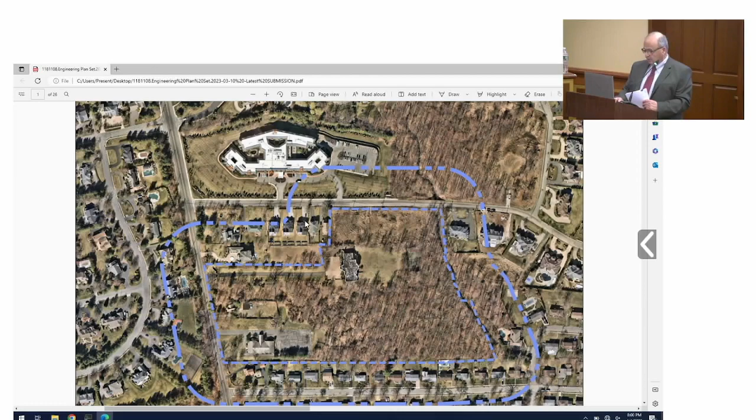The property is located on the north side of East Mount Pleasant Avenue, which runs along the left side of the exhibit. To our west is Force Hill Road, which runs along the top of the exhibit. As you can see, the area immediately to the west is the Brandywine facility that was recently constructed, maybe about 8 or 10 years ago. The adjoining properties immediately to the west are residential single-family homes. To the north are single-family residential homes in Bel Air Woods, and there is additional single-family residential construction on the far side of East Mount Pleasant Avenue.

Immediately to the east of the site is Nance Road, which is in the township of West Orange, and these are all single-family homes that exist along our eastern boundary. The property is somewhat irregular in shape, as you can see from the exhibit. It has 479 feet of frontage along East Mount Pleasant Avenue, and the property extends to the north, with over 500 feet of frontage along Force Hill Road.

On the northern boundary of the site is a tributary of the Canoe Brook, and there is a vast amount of wooded area in the northeast corner of the site. This area is classified as wetlands, so approximately 30% of the site, or 4.88 acres, is impacted by freshwater wetlands. We've received a letter of interpretation from the DEP confirming the location and quality of the wetlands. The wetlands also have what's referred to as a wetland buffer of 50 feet. Our entire project will be developed outside of not only the wetland area but the wetland buffer as well, so we don't need any additional permitting from the New Jersey DEP to develop the site, because we'll have no impact on the wetlands or the wetland buffer.

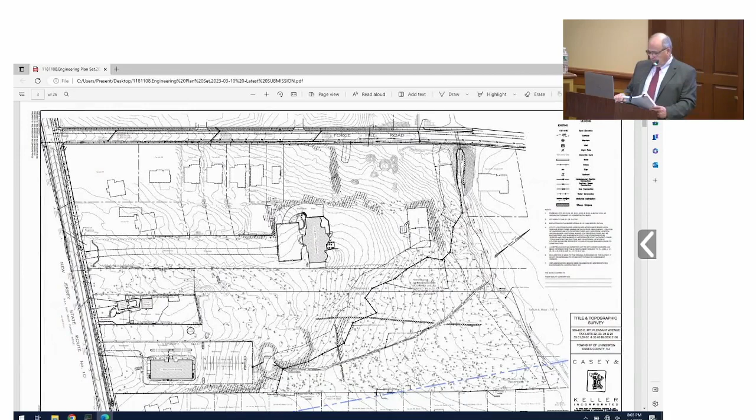I'll bring up the survey, which is sheet 3 in your plan set. Let that focus in. You can see that the wetland line runs diagonally from the western property line to the north, and then up along the tributary of Canoe Brook, which runs along this common boundary line between us and the properties to the north. The 50-foot riparian buffer, wetland buffer, runs along that line. You can see the lighter line that exists in that area.

On this exhibit, you can see the little hatched areas. These are areas of steep slopes. They're not natural steep slopes; these were created as part of the prior developments on the site. You can see there's a 5-bedroom single-family home that's constructed and set far back from East Mount Pleasant Avenue with an extensive driveway, parking court, and access to the garages. There are tennis courts at the rear, and there's a variety of walkways and plantings.

There's also a three-bedroom single-family home constructed close to East Mount Pleasant Avenue, and finally the Full Gospel Hall that exists in the eastern portion of the site. This is the church, and they had a parking area immediately to the north. This parking area drained into an existing stormwater management basin that discharged to a swale running through the wetlands.

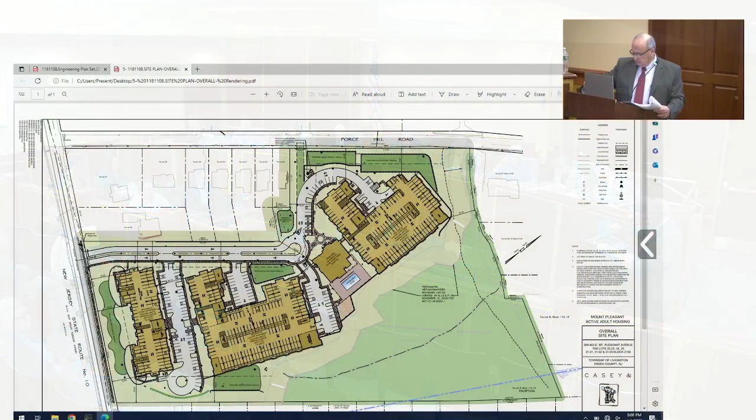Let me close that and bring up an exhibit. We took the liberty of colorizing the overall site plan. This is a colorized version of sheet number 5 in your plan set, and I think we're going to mark this exhibit A1. This is a colorized version of sheet number 5, the overall site plan. What the project proposes is the construction of 254 rental units in 3 separate buildings.

Building 1 is located parallel to East Mount Pleasant Avenue on the far southern end of the site. Building 2 would be the central building, and Building 3, along with the clubhouse, is located in the northern end of the project, closer to Force Hill Road.

The 254 units would yield a density of 15.42 dwelling units per acre, where 16 dwelling units per acre is permitted under the ordinance. All of the buildings will be 3-story structures over a parking garage, with elevator service in every building. The height is measured from the first living level to the midpoint of the sloping roof, and the allowable is 40 feet, while we're at 39.58 feet, so we're well in compliance with the ordinance.

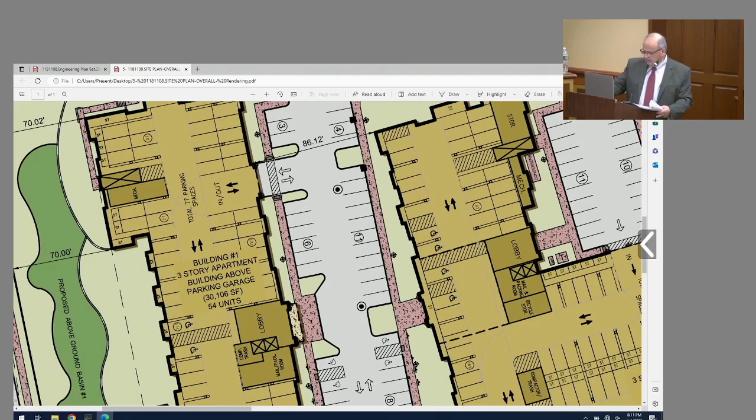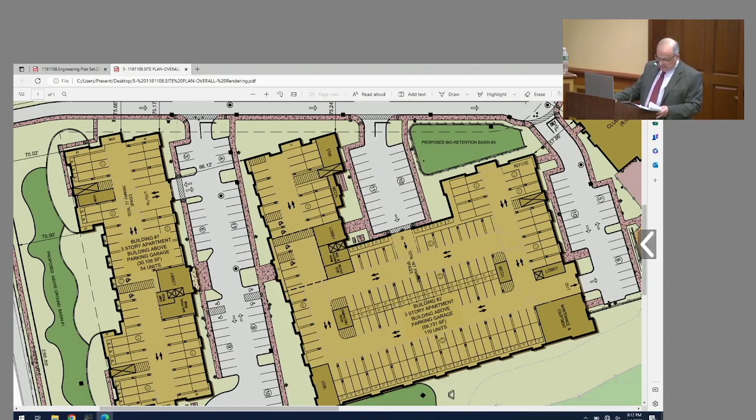There would be a total of 110 dwelling units in building number 2. The parking garage within the building would break down into 167 available parking spaces: 69 standard 9x18 spaces, again 6 of which would be EV ready, 94 tandem spaces assigned to 2-bedroom units, and 4 handicap accessible spaces.

You can see from this blow-up that there's a primary access in and out of building number 1 in its northwest corner, directly accessed off a surface parking area, so there's one way in and one way out of that building. On building 2, we come into a central area that comes in off the boulevard driveway accessed from Route 10, allowing circulation through the garage and exit at the northern end into another surface parking area that brings you back out to the boulevard.

Question: on the dual spots, how many sets of dual parking spots are there? In building number 1, we have 64 tandem spaces, so that's 32 groups. In building number 2, we have 94, so that's 47 groups.

And building 3 has 90 dwelling units, with 135 parking spaces available. 54 are standard 9x18 spaces, with 6 more EV charging stations in this building, 78 tandem spaces, and there'll also be 3 handicap spaces proposed within the garage.

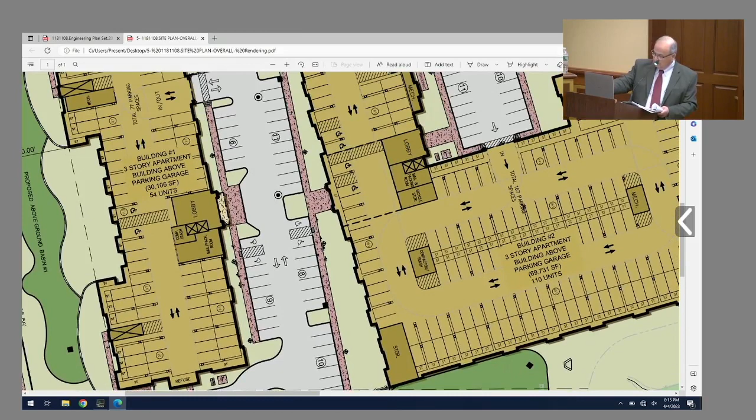On Building Number 1, we have a refuse area located at the far end of the building. The truck would come in, utilize this area to back into position, collect the refuse, and then exit via the cul-de-sac. This also provides for a little cutout by the two lobbies - a lobby on the lower level for Building Number 1 and an upper lobby on Building Number 2 - so vehicles like UPS or Amazon delivery trucks can park in this cutout and do their quick drop-off to the building.

Question: where's the access from the cutout to the building for the Amazon delivery spot? There's a lobby on the lower level here, and this is building number 1.

Is that better? Okay, here's the lobby on building number 1. The cutout is located here, so the vehicle could pull up, come into the lobby, drop off packages to the mailroom, and then come around and exit via the cul-de-sac. If they wanted to deliver to building number 2, there's an upper lobby they can access through the door located here, and they would come into the building and do the drop-off to the mailroom at that level. So there's a mail/package room in each building? Yes, there's one located in each lobby.

Let's go back to the tandem spots. How many tandem sets are there versus how many 2-bedrooms are there - are there some 2-bedrooms that don't have tandem parking or not? There's enough 2-bedroom units to support the tandem spaces in each of the buildings. But is every 2-bedroom unit going to have a tandem setup, or will there be some extras? Not everyone, no, but it'll be very close. Let me see if I have that.

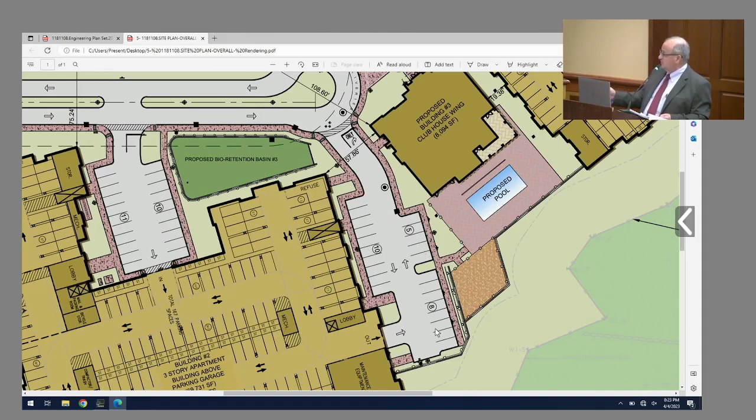Now, the only area where we did make some special consideration is along the clubhouse. The 13 spots that are located along the clubhouse are signed for 2-hour parking maximum. So we figured there'd be little events at the clubhouse, we'd want to be able to move those vehicles in and out of those spaces in a reasonable way.

So the surface spots, you need 127, and I think you had 122 surface spots unreserved. And that's where the 5 potentially having to be in building 3 comes from? That's correct. So, but does that then render the entire garage of building 3 not restricted access? Or are you going to design it in such a way that the gate is beyond just those 5 spots?

What we've done on other applications and similar projects is cordon off only a section of the parking lot, so there would be a fob-operated gate beyond the internal 5 spots or garage, not at the door. The gate would be beyond the 5 publicly accessible spots, not at the gate to the garage.

I'm having trouble hearing you, Barry. The security gate would be after the 5 spots that are indoors. That is correct. Do the affordable units park outside or inside? They'll park in either location.

So in other words, the plan right now—and everyone's concerned about the parking—is that 2 of the buildings will have some sort of internal gate or fob. Other than the tandems, which will be assigned to 2-bedrooms, once you're inside, you can park wherever you want, whether you live in an affordable unit or a market rate unit.

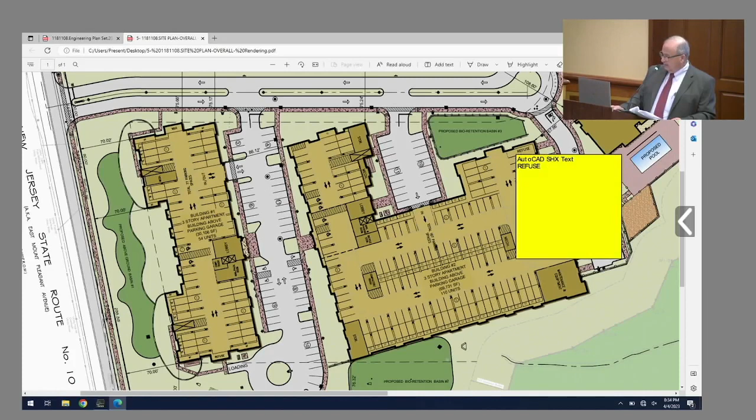Building 2 and building 3, which is the clubhouse, is the closest point at 57.86 feet, where 50 feet is required. I also want to point out the configuration and orientation of the buildings.

What we attempted to do, and I think we accomplished it quite nicely, was to orient the buildings so we could control the mass as it appears from adjoining properties and from the street.

As you can see, the orientation of building 3 is a bit cocked as it appears along Force Hill Road, which runs along the top. It's set back well in excess of the setback requirement along Force Hill Road, which is 45 feet, and we're at nearly 75 feet along that stretch of roadway.

The articulation in the facade of the building also sets it back much further from the roadway, so that even though it's 3 stories in height, much of the mass of the building is pushed closer to the wetland areas, so you don't see a massive structure. You see it broken up.

As I said earlier, the density is compliant at 15.42 dwelling units per acre, where 16 are permitted. We're limited to a maximum of 125 dwelling units in each building; the most would be 110. The number of buildings required is 2 minimum and 6 maximum under the ordinance, and we're proposing 3. The building height is compliant at 39.58 feet, where 42 feet is permitted.

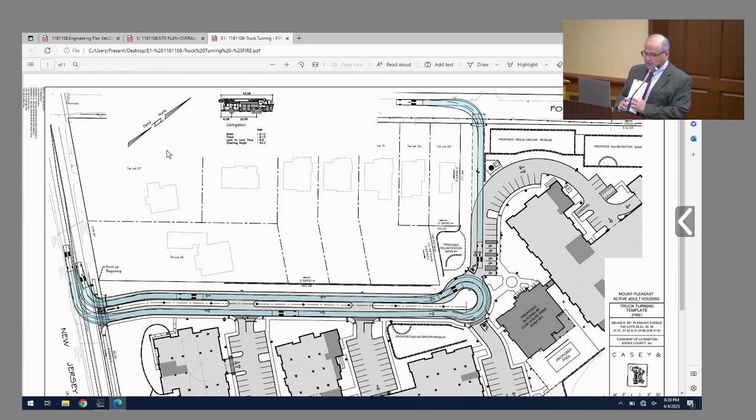What we had neglected to do—is this going to be Exhibit A2? This would be Exhibit... it was submitted as part of the set, Peter. Oh, was it, even with the coloring? It was submitted as sheet E1, excuse me, and it was blue in the submission, right? Yeah, okay, so we don't need to mark it, thank you.

So we did this at the request of the chief, to show him that the fire trucks can maneuver around the cul-de-sac.

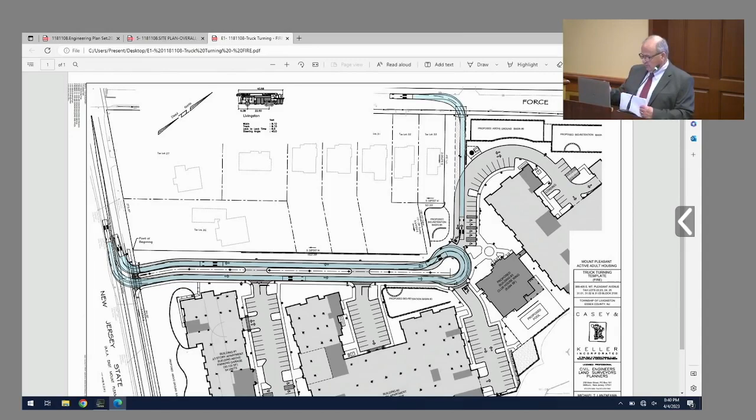We also have, as part of the design, emergency ingress and egress out to Force Hill Road. This would be a grass paver access roadway that would allow emergency vehicles to enter the site should the boulevard for some reason be blocked. We've indicated on this plan a post and chain down at the right-of-way.

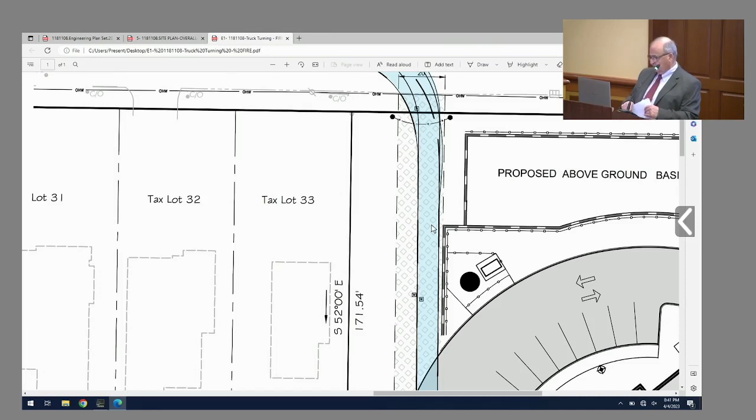What we decided to do - I didn't get a chance to update this - is we're putting a more decorative gate that would occur at the jog in the retaining wall so that it's set back from the street. That would be a more decorative metal gate with a Knox box so the fire department could unlock it and open it up to allow entrance. You'll see that on the renderings once the architect testifies.

This secondary means of emergency ingress and egress was added at the request of the fire department, and was a conversation we had at the TRC meeting. So we've incorporated that into the plan.

The other truck turning analysis we did is for the E2 garbage truck coming into the site and accessing the loading area by Building 3. You can see this can easily maneuver through the site as well and make the turn at the cul-de-sac.

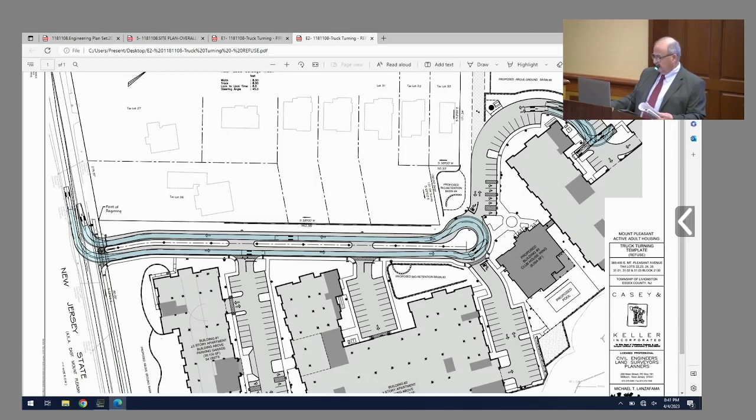A question arose: what would happen if a vehicle decided not to use the cul-de-sac to turn around? What if they came down by the entrance to Building 3 - how would they make a turn? We've allocated a space here, opposite the loading area, so a car or truck can easily make a K-type turn and exit back out of the site.

There are trash rooms located in close proximity to these loading areas so the garbage trucks can easily access them, and the maintenance staff can easily bring out the trash to those locations.

Are you going to talk more about how the trash is coming out, or is that for the architect? Well, I could talk about that. Let's go back to the overall site plan. Let's start with building number 1. In building number 1, we've allocated a refuse room at the western end of the building.

The trash rooms have chutes on every floor - there'll be trash rooms on every floor. They drop the trash down, and it's assembled in that one room. There'll be a doorway out of that room, and the truck would come in, back into position, load up, and then exit. Now on to building number 2.

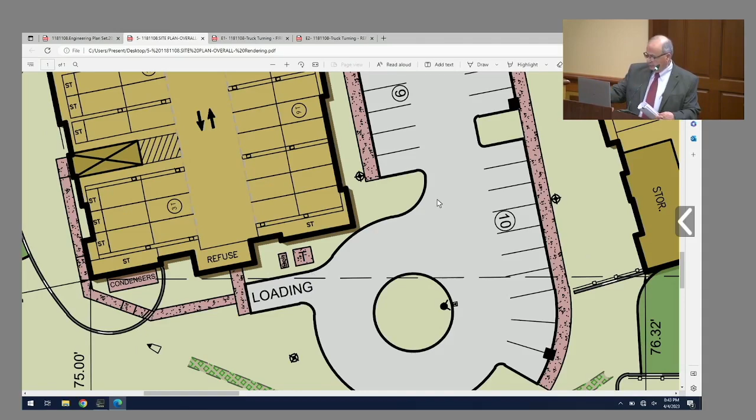Is that also where the move-in, move-outs come from, through that loading area? Yes, you can do it there as well. So if you're loading from that position, how do you get into the building - how do you get your carriage in? Move-in and move-outs can occur at this slot, at the cutout, which would allow access into the building.

Which cutout - use the cursor. The cursor's not working, but the cutout through here at the main lobby would allow for entrance into the building and use of the elevators. So you're going to park a truck where the pink is? That's a sidewalk - we'd park in the gray area right in here. This is large enough to receive a small U-Haul. Remember, these are 1- and 2-bedroom apartments, so you're not seeing a huge Allied van lines truck come in - you're looking at smaller U-Haul type trucks.

Even some of those smaller trucks can fit into these parking spots without a problem. So the idea is to utilize this cutout and these sidewalk areas - you could bring stuff across into the lobby, and that would also allow for move-in and move-out for building number 2. You can see we have a trash compactor located in building 1. Once the compactors are full, they bring them over to the refuse area where they're staged for discharge into the trucks.

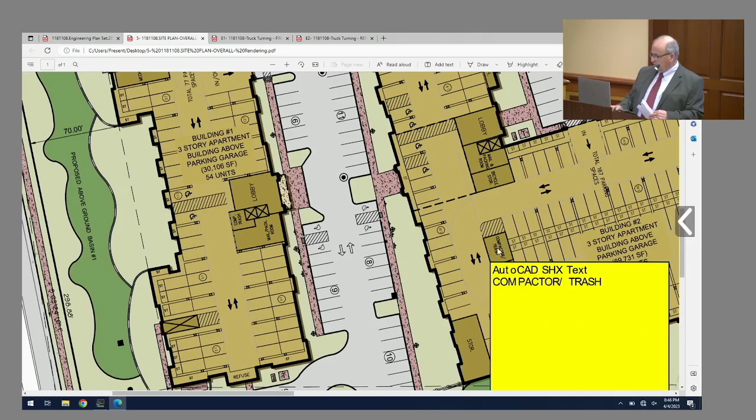Wait, I'm sorry, so the lobby's on the parking level? This lobby is on the parking lot level, got it. Coming in here, again, we have a trash compactor in building 2, located centrally in the building.

Again, we have the refuse proposed at the far corner of the building, so we have to get the refuse containers at that location. What we were anticipating is that the garbage truck could either pull up along the roadway here, fill it up, and then utilize the driveway to the garage as a means of making a K-turn.

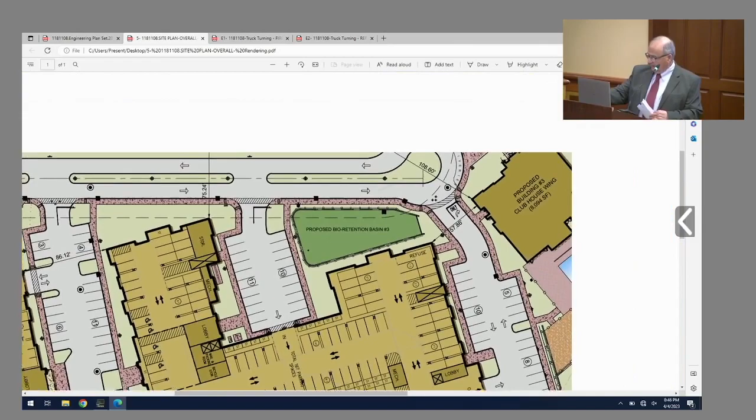Mike, I'm confused with that one. Building 1 is simple to understand - you're talking about moving the garbage, which is not our problem, it's the building management's problem, from the far side of the parking lot across to the pink and green area. Where is a garbage truck going to come in, whether it's a front load or a back load? He's going to pull up alongside the driveway here, load up, then come around and make a K-type turn here and exit the site. That's what we anticipate.

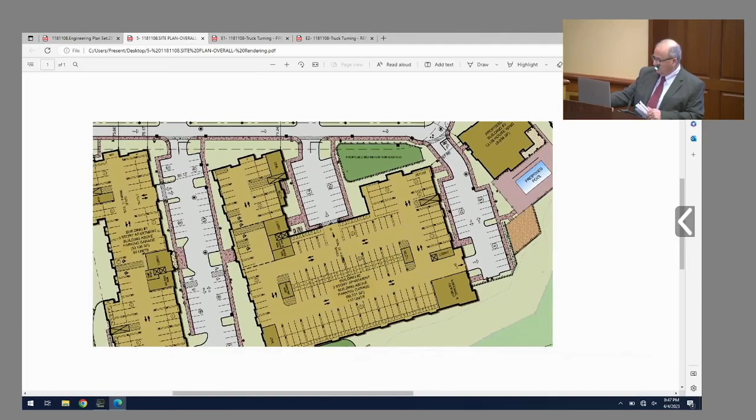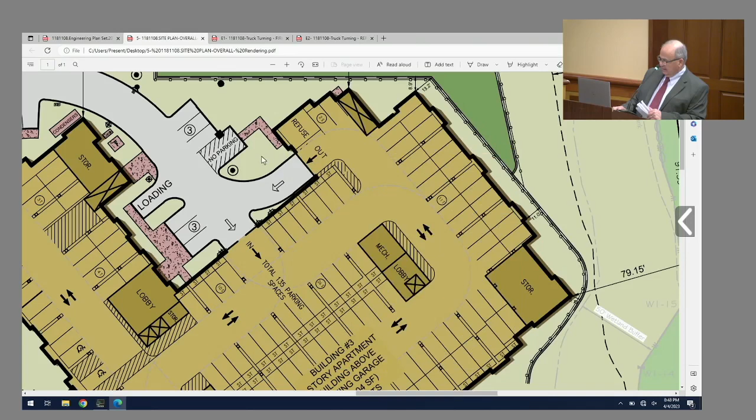With regard to building number 3: the trash compactor is located in the garage level, and we propose to take it to the north side of the building. There'll be a refuse room here. That would allow the truck to come in, pull in through here, back into the no parking area, and load the truck. It can then exit - no, he pulls into the loading spot, backs in. The walkway would allow them to bring the refuse out to the truck, and then it makes that right-hand turn and exits the property.

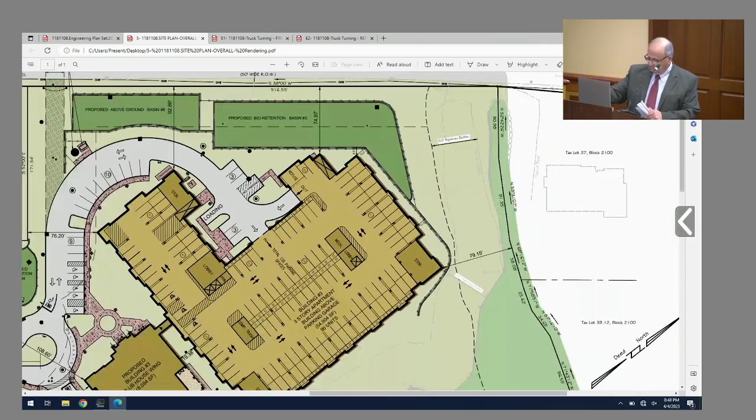Is the loading spot in front of building number 2 as well? Because it didn't seem to be a specific loading area. No, what we did was have the loading area in front of building number 1, directly opposite the entrance to building 2. There is no special loading area for the back building.

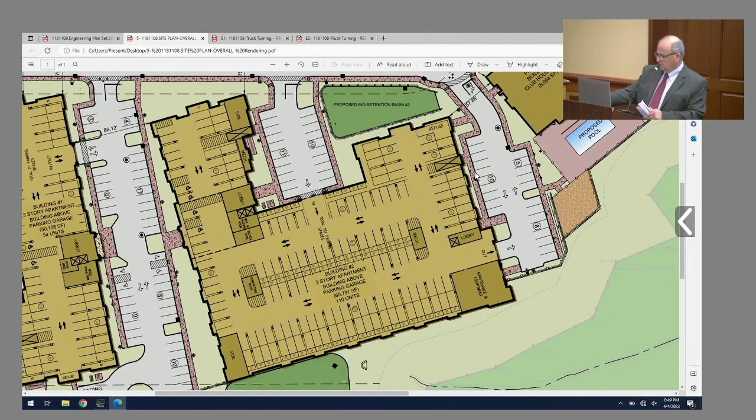Can I ask, Mike, is there a definition of a loading area in our ordinance? Does that meet it? Yeah, it has to be 10 by 25 feet, or 10 by 26 feet. They're all compliant, marked as a loading area. So is there a requirement for one for each building? It doesn't say we have to have one for each building.

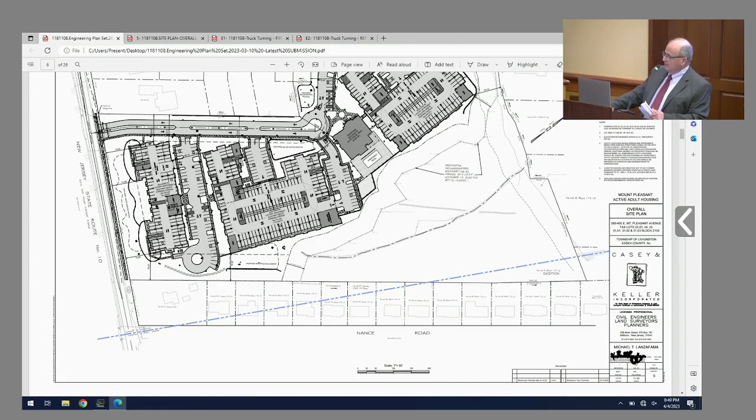But what we've done is created loading spots at key locations for trash removal and for move-ins and move-outs. In some instances it's a parallel park type spot, in other instances it's like a tailboard type spot. So going back to Building 2, which is the largest number of units of all the buildings - I believe Building 2 is the largest, has 110.

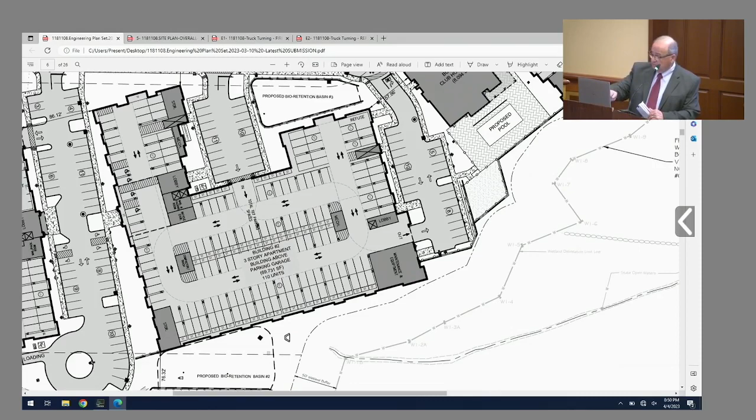So where is the loading then for people moving in and moving out? They could park at the area opposite the lobby level here and come into the building. There should have been a sidewalk here so they can come across, come into the main lobby, into the elevators and move in. So if a truck is there and cars are trying to park, including handicap, is there room? There's plenty of room for that, or they could park across the street in that cutout.

The truck would pull into this spot - that spot, for Building 1 and 2? Correct, and then they could do the move in and move out. Remember, the landlord can control when and how the move-ins occur. We also have the loading spot here for the refuse pickup. As I mentioned earlier, many of the trucks moving in for a one-bedroom apartment are going to be small U-Haul type trucks, and those could probably even fit into some of the parking stalls located near the cul-de-sac.

Unless they're already used by the people living there. So just explain, the Building 1 loading spot - is that like a parallel park spot? Yes, and that's the main entrance to the building, so the truck's going to be parallel across the front door and people are going to carry their couch across the parking lot? No, there's a large sidewalk area here. But that's the entrance to the building. Yeah, it's not really a loading area, it's the front entrance of the building, but it's a sidewalk plaza area.

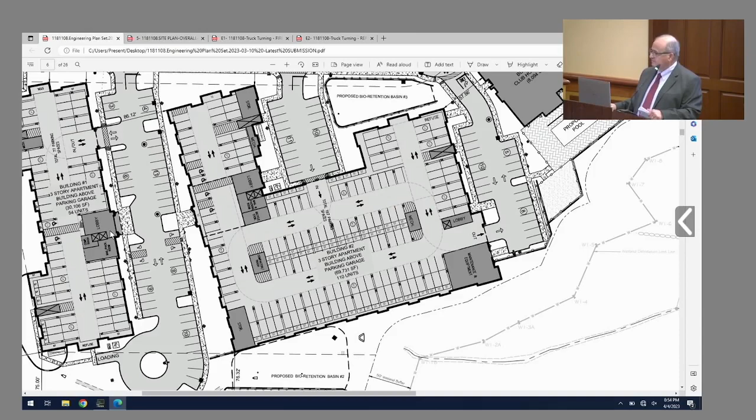And you have the Amazon, the mail, and the UPS truck all doing the same thing at the same time. But that could all be accommodated in the design. As I said, we can make some minor adjustments to the plan and easily accommodate all of that.

Good luck. Thank you.

So we're done with the trash and the moving discussion. I wanted to get to the stormwater management aspect of the project, which I know is of great concern to everyone.

The overall proposal we had in mind was to break up the runoff into smaller, more manageable stormwater facilities. Under the new BMP standards, we're limited as to the drainage area that should go to each detention system - about 2.5 acres - and we've accomplished that in this design.

On building number 1, we've created a large decorative lawn panel that would exist between Route 10 and the face of the building. The roof water from that building would discharge into this area and be detained. This would be a large lawn panel and could double as rec space for people that might want to walk or come outside for a while. It's a large open lawn panel.

This then discharges into a grassed swale that runs along the edge of the cul-de-sac between buildings 1 and 2, and into a second detention facility that is a bioretention basin. A bioretention basin has a 2-foot layer of a mixture of sand and topsoil that allows water to percolate through it, which purifies the water column as it passes through that soil.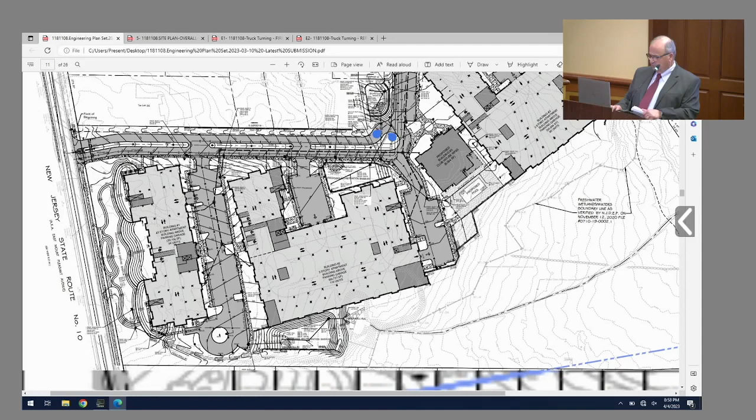One of the comments in the engineering memo was that perhaps we should put in some inlets along that area, which we can certainly do. We can add that to the plan. We'll be happy to do that.

There's a fourth basin located in front of building 2. That again would pick up the roof water as well as the paved surfaces from the parking court in front of building number 2.

There are two detention facilities, detention basin 5 and 6, located along Force Hill Road, that pick up the remainder of the parking area and the roof water from building number 3.

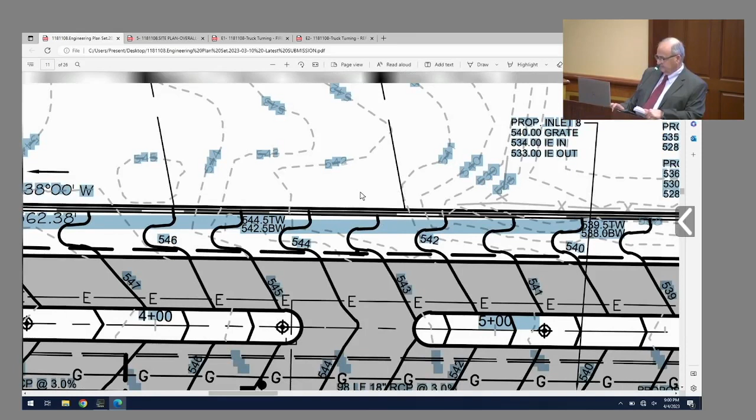Detention basin number 5 is more like a traditional detention basin, in as much as detention basin number 4 actually purifies the water, and then it discharges or overflows to basin number 5.

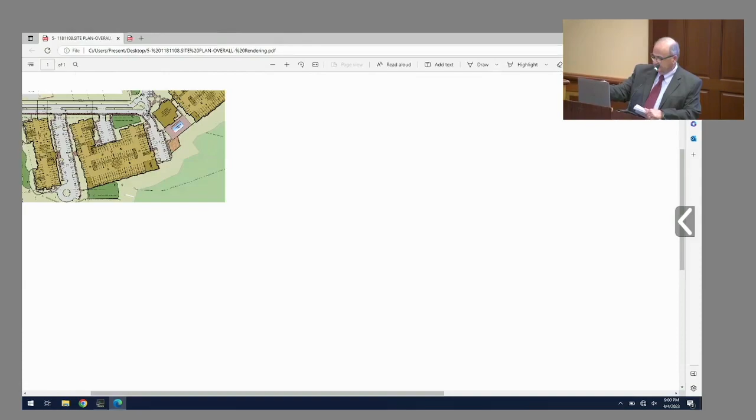We could use this exhibit. It's not cooperating. Let me close some of these.

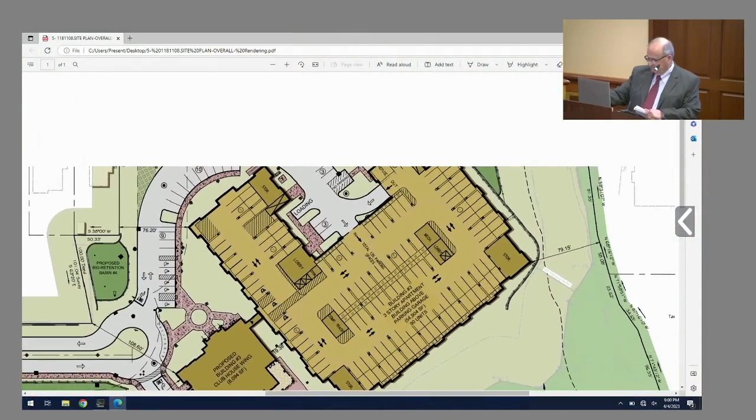As I was saying, detention basin 5 is a more conventional basin. This receives runoff, which is first purified in the bioretention basin 4. It then runs into this area and discharges to the collection system in Force Hill Road.

Basin number 6 is a bioretention basin that receives runoff from the parking area and the roof water. This also then discharges into the stormwater collection system in Force Hill Road.

The overall design meets the BMP standards with regard to reduction in peak flows, so that the existing condition is reduced by 50% for the 2-year storm, 25% for the 10-year storm, and 20% for the 100-year storm.

For the 2-year storm, for example, the peak flows from the site are being reduced by 9.11 CFS. For the 10-year storm, 16.24 CFS, and for the 100-year storm, 13.03 CFS. So we clearly meet the regulations with regard to stormwater management.

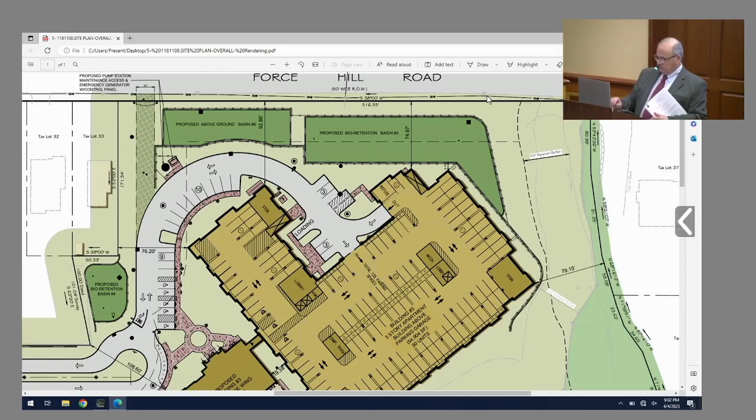You can see on this exhibit that the sanitary sewer, because of the topography of the site, is going to be collected at the low point of the site, and a below-grade pump station would be constructed at this location. The force main would then run from the pump station back up through the site, and out into the sanitary sewer on East Mount Pleasant Avenue.

Water supply would again be looped from East Mount Pleasant Avenue right through to Force Hill Road, providing positive pressure for the site. That would give us adequate flow and volume.

Each building will have a fire suppression system. There'll be adequate hydrants located on the site. I spoke to Chief Mullen about that. He said he'll review it one more time and make some recommendations with regard to hydrant locations. We'll provide, wherever he thinks is appropriate, hydrants for the site.

One thing that we did indicate to him that we would do and did not show on the plan is that the entry driveway, we would post it with no parking signs. He was concerned that if someone should double park there, he'd have difficulty getting his fire apparatus through. We told him we would make that adjustment, and I would make that representation to the board here this evening.

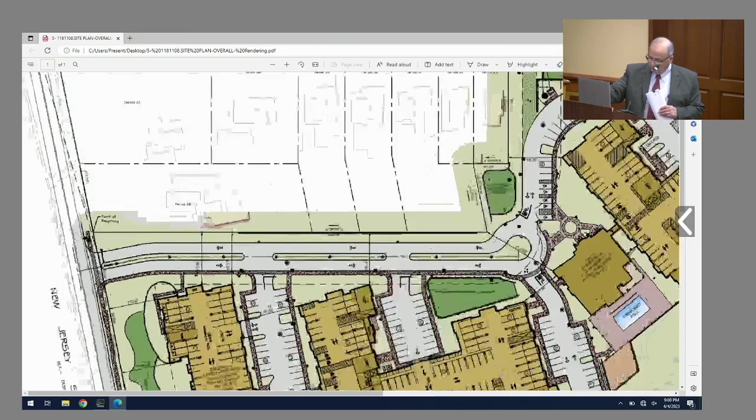We do have a monument sign proposed at the entrance in the center median of the island at the entrance to the project. This would be fully compliant, set back 5 feet from the right-of-way line as required by the ordinance. And each of the buildings will have an identification sign over the entrance canopy, which is also permitted by the ordinance.

We also have a number of traffic control signs that would be utilized throughout the project, all in compliance with the Manual on Uniform Traffic Control Devices, and consistent with what you typically see in a project of this type.

So what specifically is the variance? The walls we're proposing are 10 feet high. The ordinance indicates that retaining walls cannot be higher than 18 inches. It's a height variance. One wall or more than one?

It's a series of walls that exist and create a terracing effect. There's a single wall that runs across the entire front of the building, between Force Hill Road and the building. There are retaining walls that are below grade, not visible, that are less than 18 inches high, that form the detention basins. I don't believe those require a variance, but I believe the ones along the front facade, as I'm pointing to here, might require a variance.

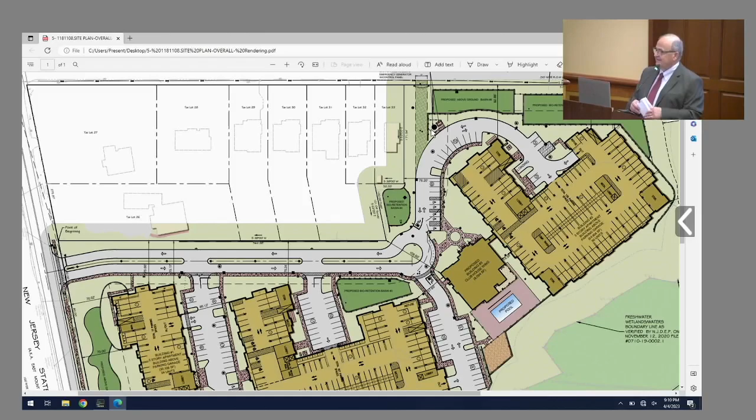Mr. Lanzafama, as I recall, I was going to pick up on it. As I recall, that ordinance on the 18-inch permissive referred to a front yard decorative wall. Correct. You're talking about a retaining wall that's multiple feet. That's correct. So you're really talking about a separate section of the ordinance. I don't have it before me at this point, but considering the height of the retaining wall, is there a requirement that there be a fence atop it for safety reasons?

There is a fence proposed on top of this wall, and the fence is compliant with regard to the maximum wall height permitted under the ordinance, which is 120 inches. Can you just show us real quick where that condition is going to exist, the multiple, the tiered walls?

So the wall that's exposed, that's visible from the street, is the retaining wall I'm pointing to along the front of building number 3. The retaining walls that outline detention basin 6 and detention basin 5, you don't see at all—those are below grade, and those I don't believe need a variance. But what we were not clear on, we just wanted to err on the side of caution and ask for the variance. If the board feels that a variance is not required, so be it.

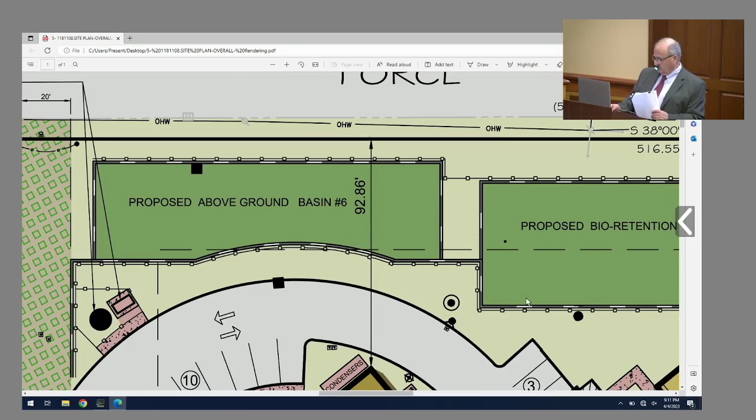So it's just this retaining wall that runs across the front of the site, and that wall gets up to 10 feet high in some places. So what's the topo from there to the curb?

Just generally - from the top of the wall to the curb, or the base of the wall? Trying to understand, it varies, we're talking up to 10 feet. This is the low end, this is the high end, towards the building.

Right. So it creates this upper plateau on which we've done an extensive amount of landscaping to help soften the appearance of the building.

But when you're looking at it, when you're driving by, are you looking up and it's 10 feet on top of that, or is it relatively flat? Because about 5 or 6 feet of the wall is actually buried in the basin, so the exposed area is only about 4 feet high. And with the landscaping we're proposing along Force Hill Road, you hardly even notice it.

Well, we'll see that one. Correct, correct - Mr. Conway has some good exhibits for you.

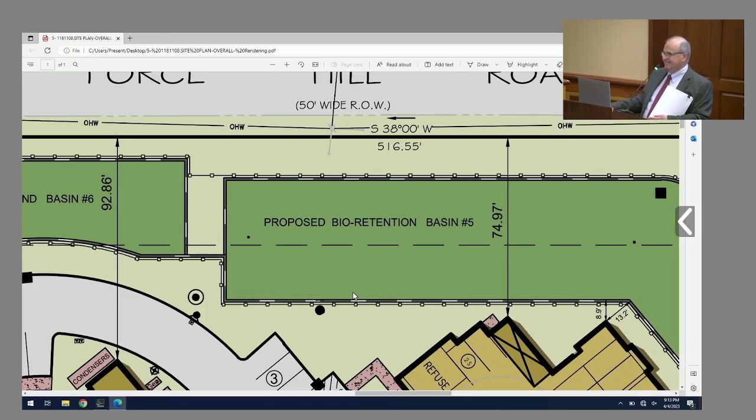The section you were thinking you may need a variance for - that's the section under fences that refers only to decorative walls, correct? That was my take on it, but I've run into a problem with Ms. Jackson on several occasions. My sense is that section's not applicable - the other section that caps it at 10 feet is what's applicable to me.

Correct, because that refers to retaining walls versus decorative walls, and we are compliant with that. That's my sense as well - I'm sorry, that is my sense as well.

Okay. But I do have a question on the building identification sign that you mentioned - is that going to be on the wall or on a canopy? It's going to be on top of the canopy.

But then I think you need a variance for that. I beg your pardon? Hi, this is Barbara Allen from Beacon Planning - the ordinance actually permits the signage subject to review. So there isn't a prohibition against signage on top of the canopy?

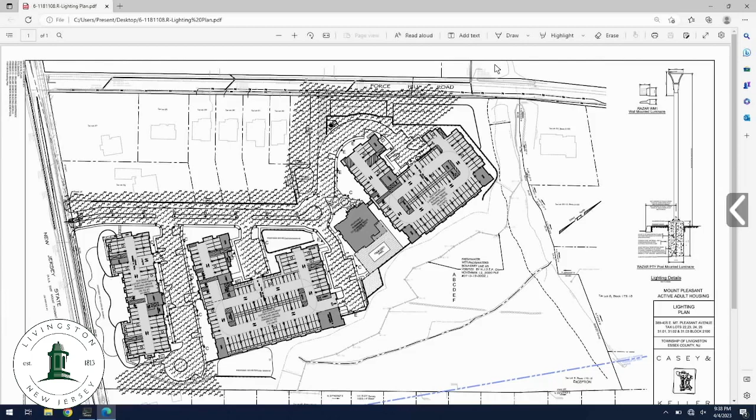For the entry drive, the statistics I achieved were a 0.5 foot candle minimum, a maximum of 3.4 foot candles, an average of 1.6, a minimum to max ratio of 6.8 to 1, and an average to min ratio, which is uniformity, of 3.2 to 1. Whenever I'm able to get that uniformity ratio below 4, I feel like I've done well, so 3.2 to 1 is quite good. For the entry plaza, we have a minimum of 1.1, a maximum of 2.2, an average of 1.7, a minimum to max of 2 to 1, and an average to min of 1.5 to 1. That's going to be a very uniform, even light level.

For the balance of the site, the design parameters I chose were a half foot candle minimum and a 1 to 1.5 foot candle average. For parking lot 1, we have a 0.5 foot candle minimum, 2.6 foot candle max, 1.3 average, 5.2 to 1 max to min, and 2.6 to 1 average to min. That's very good uniformity.

For lot 2, 0.5 foot candles minimum, 2.2 foot candles max, 1.1 average, 4.4 to 1 max to min, and a 2.2 to 1 average to min. Lot 3, again 0.5 for the minimum, 2.1 for the maximum, 0.9 for the average, 4.2 to 1 for the max to min, and 1.8 to 1 for the uniformity. And finally, the rear drive and parking area, 0.5 for the minimum, 2.9 for the max, 1.2 for the average, 5.8 to 1 for the max to min, and 2.4 to 1 for the average to min. So we have really good light levels and really good uniformity throughout the project.

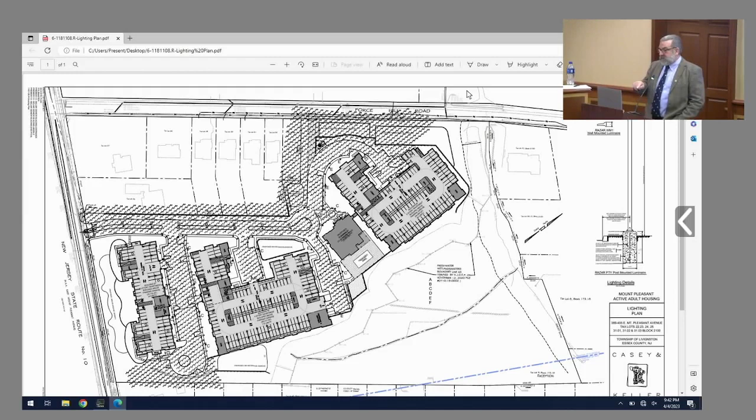The other thing we wanted to mention is the monument sign is going to be ground lit, not backlit. I was told to correct on that one. And then regarding lighting from the building, there is no lighting on the buildings that contributes to site lighting, other than 1 or 2 building-mounted lights shown on the lighting plan, the Type A fixtures.

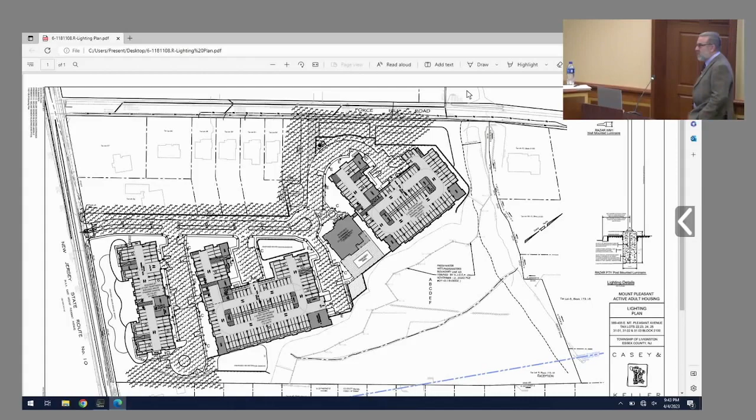The area around the curb that goes to Building 3, and then there's the lot, the emergency exit roadway, and then there's a lot. It's very hard to see the numbers on the plan we're looking at. My old eyes don't see them at all.

So that shaded area, what is the light spillage, and that's it? At the property line there's going to be a solid fence and an evergreen buffer, so there won't be any spillage onto the neighboring properties. At all? At all. The calculations were done without accounting for that. And on that side, also, the people, because that's along the full side of their homes, to be able to see the light, looking at a light source.

So no house side shields there either? The house side shields were provided where they were required to control the lighting. So there's no lights near the property line in any of those situations, I don't believe. As long as you're comfortable to say to me that the people living there are not going to be looking at a light bulb if they're looking out the side of their house. I'm good. Okay.

That concludes my lighting testimony. If there's any more questions, or would you like to do landscape as well and catch them both together?

One question, I don't know whether you touched on it in lighting, so I'll ask it now. The fence along the western property line looks like it extends to about the middle of the house that's immediately adjacent. I don't know if anybody's been in contact with that neighbor to see whether they'd want it further, closer to Mount Pleasant. I'm pretty sure we're going to be running that fence the entire length of those property lines. I don't know what's...

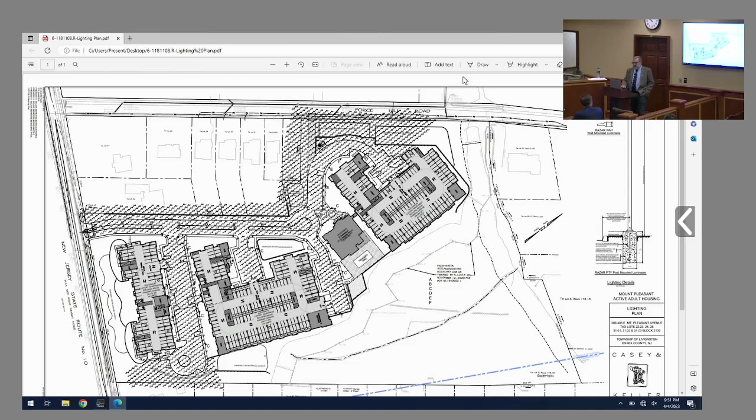And what's the fencing look like? It's a metal picket fence. What was the fence? I'm sorry, I didn't hear. Metal picket. So like the aluminum squares? What's the height of those fences? 48 inches, for compliance.

The next design parameter that we had was buffering the adjacent residential uses. As you can see, we're providing an evergreen buffer against all of the residential uses along the properties on Force Hill Road, along the properties on Nance Drive, and as well as the one on Force Hill Road down by basin number 6.

Looking at your eastern side, there are some properties that don't back on the wetlands, but you don't seem to have any plantings to protect them. I have an exhibit for that, I'll get to that in a second. Thank you.

And as you can see, where we have the ability to open up, the buffer is not just a single row of trees, it's a staggered row of evergreen trees with ornamental trees and shade trees mixed in with it. The idea was to really try to go all out and make the buffer effective as well as attractive.

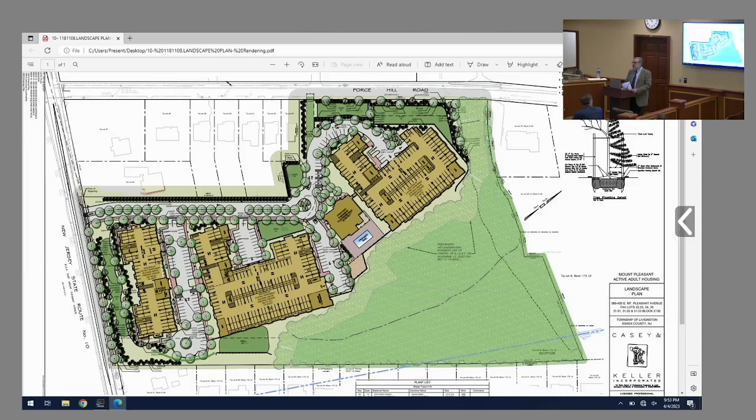So to Mr. Klein's question, the upper sketch here shows some additional planting next to basin number 2, and behind those properties in South Orange—when we were West Orange, I'm sorry. When we were working through the design process, we were trying to determine what, if any, of the trees could be saved there.

We weren't able to get it done in time for our submission, which is why we prepared this exhibit to clarify that. And there are some existing trees in that area that we're going to try to save, and we'll get the evergreen trees planted around there. I've also included a shade tree in that area also.

And then if we could look at this same plan, and I guess this is A3? Yes, A3. The lower right-hand corner shows the lower right-hand corner of Building 3, at Lot 37 on Force Hill Road, where we provided some additional planting based upon our client's conversation with the neighbor—we're going to provide some additional evergreen plantings on the top of the wall at the corner of the building to provide some additional and enhanced buffering.

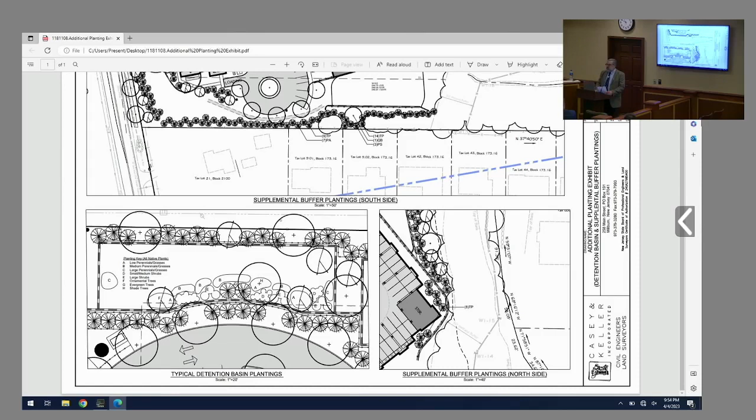Okay, for the next thing I'd like to discuss is the street interaction and buffering. I have some sections that we can look at to illustrate this. This would be A4. Correct. What we have here are, if you look at the little key map, two sections through basin number 1 that depict the plantings, as well as the landform of the basin and the building and how it all relates and ties into the street.

So we already discussed how the Mount Pleasant basins and plantings were designed and what the intent was. If you look at this section, you see the street trees nearest the street, and you can also see that there's a double buffer proposed. There's a row of evergreen trees and mixed planting out near East Mount Pleasant Avenue, and then an additional row up near the building.

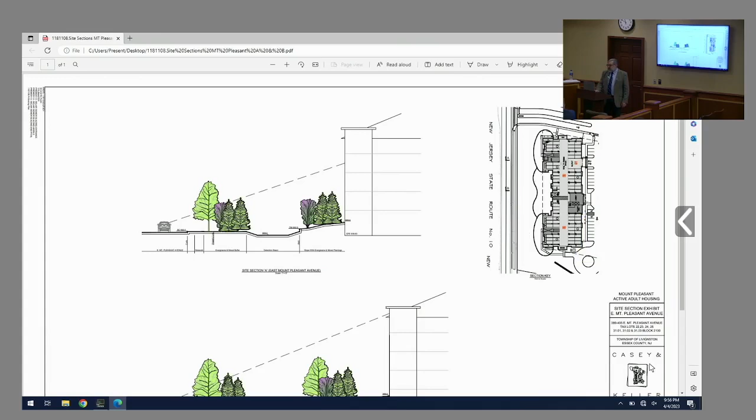So the top one shows the condition where the planting is at the same level as East Mount Pleasant Avenue, and the lower one, which is taken through the middle of the building, shows the planting up on a slight berm that we were able to create there to get the plantings a little bit higher. But you can get a very good feel of the scale of the plantings and the buildings and how that's all going to interact.

I know I've prepared these exhibits for you folks many times before, and I've used similar tree blocks. They indicate an approximate 10-year growth rate. The evergreen trees are shown at 18 feet by 9 feet. The shade trees are shown at 28 feet by 15 feet wide, and the ornamental trees are shown at 16 feet high by 8 feet wide. I think that's a conservative look at what those trees would look like in a plus or minus 10-year picture.

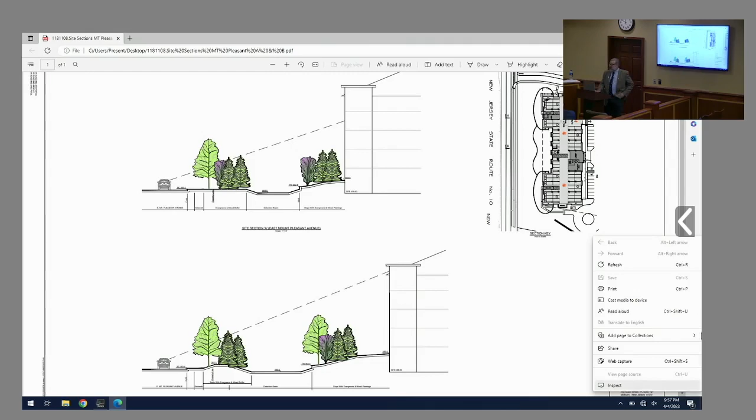Okay, I also prepared an exhibit so we could look at Force Hill Road. I think the sections will help really illustrate what Mike had said. This would be A4? A5. So this is the site section heading north.

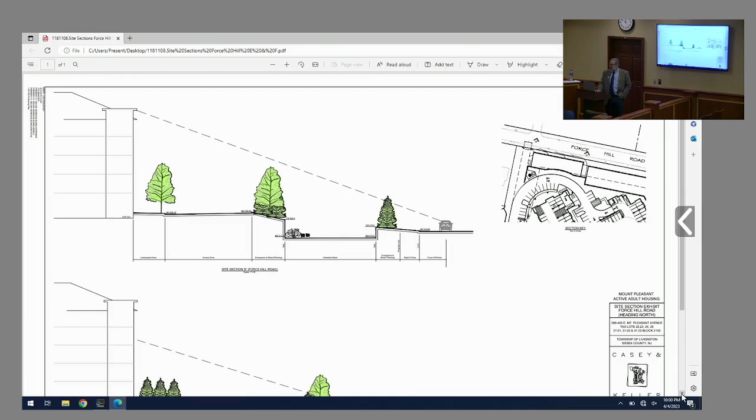And then the lower section is the final one, and that again shows the roadway, the buffer near the building, buffer near the roadway, the wall going down to the basin area, then the wall coming up, and then the plantings between the basin and the building.

To recap and get some statistics on the record, as Mike had mentioned before, there were 1,702 existing trees on site, 429 to be removed, with a replacement requirement of 590. We have 467 replacements provided on the submitted plans. That's 116 shade trees, 37 ornamental trees, 314...

Can I get that a little slower? Sorry - 467 replacements: 116 shade trees, 37 ornamental trees, 314 evergreen trees, and then that puts us at a 123 replacement tree shortfall.

The number of trees planted will increase because the numbers I've shown here do not take into account the additional exhibit we prepared with the additional trees, and it also doesn't account for what we're going to do with the basins. We're still going to be short. It's our client's directive to try to plant as many of those trees as we can on site so that they and the tenants could enjoy them. So we're going to try to do everything we can to find opportunities to increase our tree yield during construction. That concludes my landscape testimony - I'm happy to answer any questions.

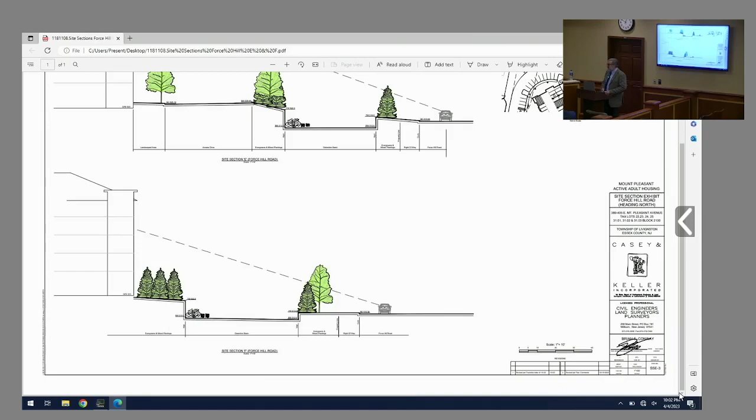The evergreens that you're showing along, well really everywhere, but along the western border - what type of evergreens are you going to plant? I believe those are green giant arborvitaes.

Okay, because you were given growth dimensions that sounded more like a pine. Yeah, you were given pine trees that didn't maintain a fit - they'll be in a narrower form, even if they had to be sheared ultimately. Understood, okay, and they're going to get the height you quoted, the 18-foot - I think you had a much larger diameter than would fit there and be appropriate up against the fence. Yeah, that was just a typical evergreen tree for the section. Okay, gotcha.

Anybody from the board, professionals, landscapers, anybody from the public have any questions?

Hello everyone, this is Rishikesh Piparipalli from 18 Force Hill Road. I'm actually facing the back side of the building, on the west side, so I had a little concern. First of all, I want to thank the township and the developer for making the adjustment to remove the secondary access point from Force Hill Road - that was a great win for everyone, I guess. A little concern, I think, yes, right over there.

So which one was your house, I'm sorry? 18 Force Hill Road - is it the middle one? Lot 30, if you can see that. Yeah, lot 30 is the - yes, middle one, that's the one. Yeah, so I think the trees that have been proposed there are probably 7 to 8 feet, but you have a 10-year projection.

I think even though there's a fence there, I really couldn't understand - looks like there's a retaining wall and a 4 feet fence. But I want to make sure the fence is high enough to cover the vehicles, and the trees should probably be tall enough to make sure there's some privacy to our bedrooms.

So in the area we're talking about here, we have the height differential between your property and our property. There's a fence, there's a row of evergreen trees, there's the row of street trees down the center median, as well as trees and evergreen trees along the other side of the building.

Some of the renderings that you have shown for the Force Hill Road side, like on the basin side, it really has a pretty good view from the roof line all the way to the street, right?

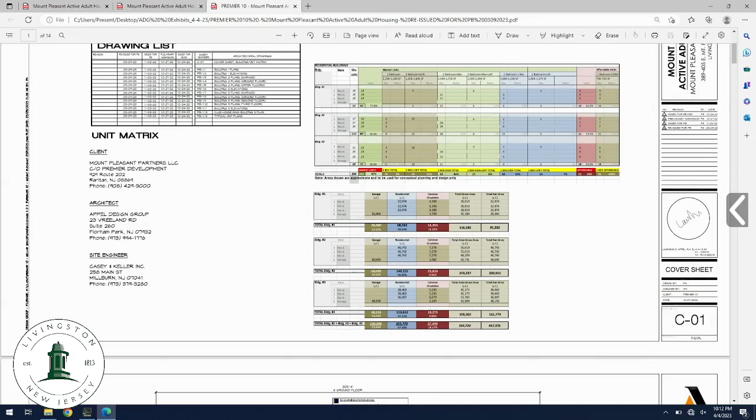The distribution is shown on drawing C-01, which has a unit distribution matrix discussing how the units are distributed across all the buildings, along with tabulations. I'm going to move on to PB 1.1, and the comments I'll be making are common to all 3 buildings.

Each building was designed to accommodate the grading and topography of the site. As Mr. Lanzafama said, they were designed to nestle into the grade with parking tucked under. Accordingly, the low side exposes access to the parking level.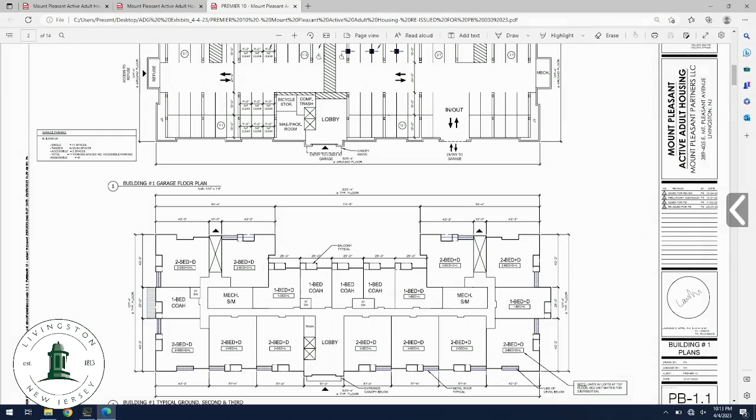Parking was already discussed by Mr. Lanzafama—it's a combination of secure and assigned stalls. Yes, we will have security gates for the building. Parking areas within the secured area will be assigned stalls, and access to the secure portion of the garage will be via key fob.

I think Mr. Lanzafama was spot on that building number 3 will have an area easily identified as a loop, where you can have public access for additional guest parking. That's the only building I believe was a little bit short.

Access to the secure portion of the garage, again, will be key fob, and first responders will have a Knox box to get into the garage. One of the questions was about ventilation—the garages will be mechanically vented. This gets engineered, not in this portion of the project, but when we do the permit drawings.

Another question raised was about the garage ceiling. Yes, it'll have a finished drop ceiling, but based on the topography and grading, this set the height of the garages. The garages have ample height—we'll have close to about 10 feet. Again, this was a product of grading and working with the topography and Mr. Lanzafama.

Yes, the building is fully suppressed—the garage all the way up, and all the residential floors above as well. There's a movement, and I don't have the specifics, to keep EV charging stations out of garage areas, since as we all know they occasionally catch fire. Is that something you've read about or are concerned about? I've heard of things here.

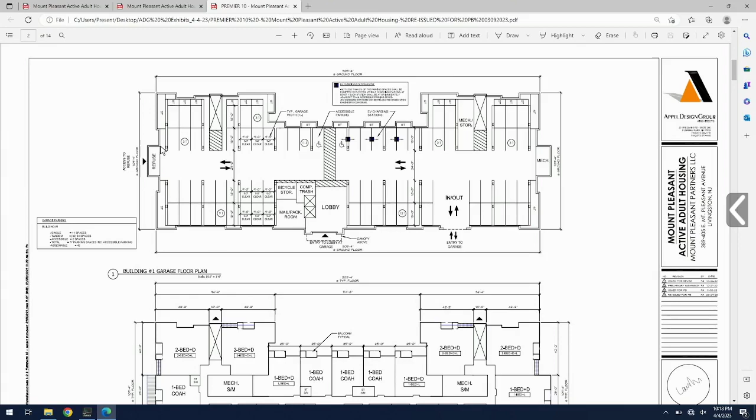Are those the 9-by-9 spaces? No, I'll point to this area. You have storage areas, the STs, dotted around the space. We make accommodations for mechanical space, utilities, and storage. When the building gets fully engineered, some of these spaces may adjust somewhat. But the idea is we wanted to take this excess and provide storage, because these are excellent spaces for residents.

So what I think Peter is asking is, what is the length of the parking spaces? No, there are spaces which are 9 feet by 9 feet, and they're in pairs. What are they intended for? Some of those storage spots are at the foot of a tandem stall, and some at the foot of a regular stall. It's where the building is a little deeper than needed just for drive aisle and parking, so we tried to repurpose those spaces. Some will be used for utility meters, some for mechanical spaces, but where we can accommodate tenant storage, I think it's a great opportunity.

One item mentioned also is we will have a small generator located on the site plan for each of the buildings. This is intended to serve security, access controls for the garage, and some lighting for emergencies.

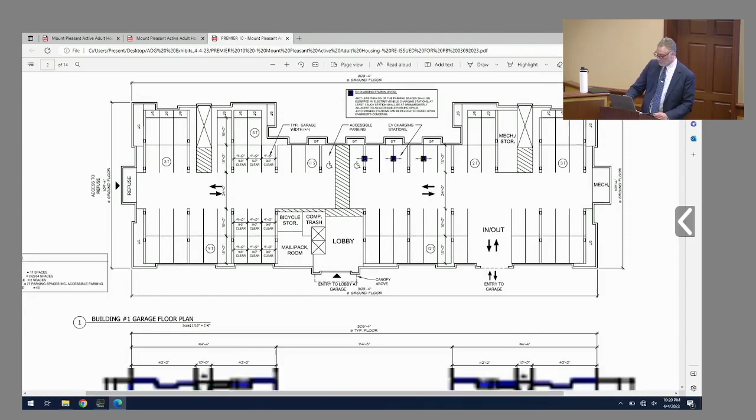Each of the buildings, although similar in design, are a little different, and I'll highlight what's different. Building number 1, I'll locate it on the ground floor here. The lobby entrance is at the garage level, and we'll have a mailroom and package room for residents there.

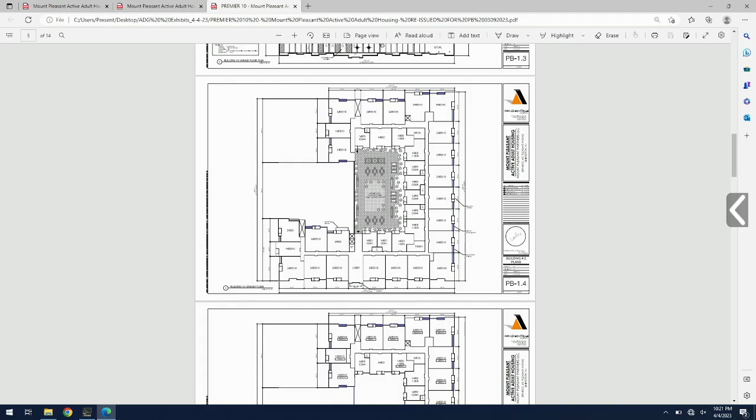Building number 2 has lobbies at both the garage level and the ground floor. This has to do with where parking is and where access points are. The lobby entrance is at the ground floor, and we'll also have a mail and package room for residents. This building also has an additional spot that is a maintenance area for the landlord, a place for storing materials. One thing we discussed is there may be opportunities in front of these spaces or other areas to provide additional loading areas, and this will be discussed at the next meeting.

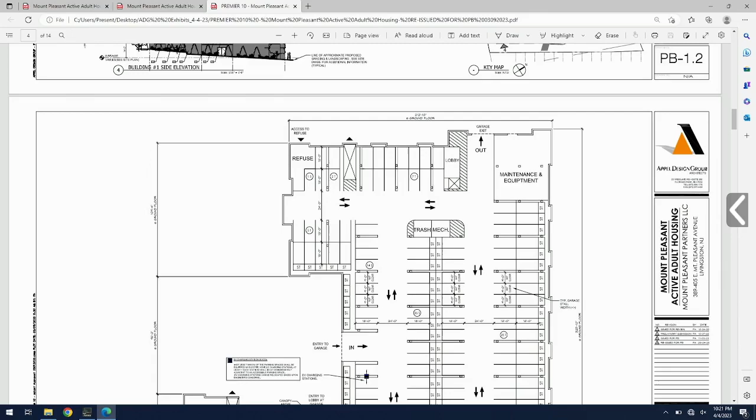Building number 3, in a similar way, has lobbies at the garage level and the ground floor. This building is a little unique, as we discussed. We've combined the main building entry with an attached clubhouse, and I'll talk about that later and bring up the plan. As part of the lobby entrance, we will also have a mail and package room for residents.

Also, both building number 2 and building number 3 have an amenity courtyard, and an amenity deck above portions of the parking.

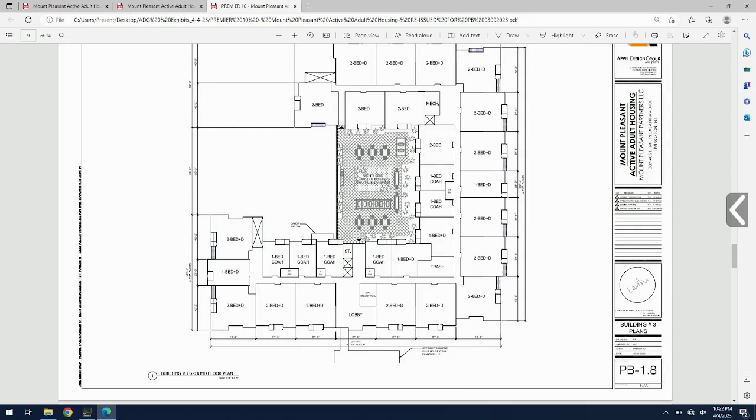Now I'm going to go to one of the upper floors to provide a sense of how the buildings are set up. Again, I'm looking to discuss the common features, not each of the 3 individual buildings. All the buildings are elevator serviced. Typical of all floors, market and affordable units are intermixed. The unit matrix on the cover page shows the breakdown of each building respectively. Residential units orient around that exterior courtyard, which will have passive outdoor spaces for the tenants. These are spaces that have become common and customary for luxury communities like this.

The other floors are similar, except that at the upper floor, as I've mentioned on several other projects, we've used the attic space to create some volume for the upper floor units as well as lofts. These units take advantage of the pitch roof to utilize what normally would be wasted space. The lofts are specifically designed as auxiliary spaces for residents, similar to other projects, and we believe this is a perfect complement to the pitch roofs. The lofts will not be a bedroom, and the dens will not be a bedroom. These are open, not enclosed spaces, and we believe they're great for people working from home or for additional recreational use, especially in post-COVID times.

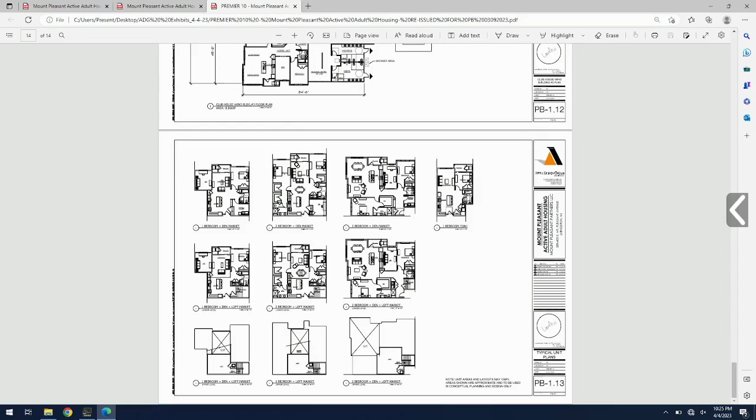All of the units have their own heating and air conditioning system. As we've done on other projects, we've designed these with Magic-Pak units, which are self-contained, but we've turned them 90 degrees from the facade so that they're pointed to the side so they become less apparent and hidden in the jukes and jogs of the building.

All the units have their own washers and dryers. That includes both market and affordable units as well.

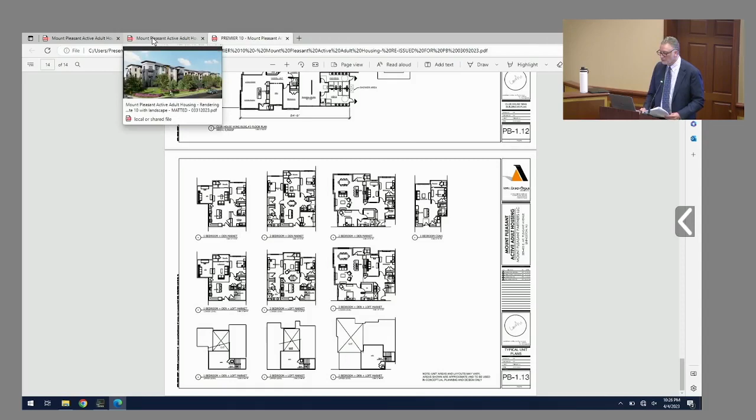I'm going to move to the rendering, and I will... Before you do that, just a couple of quick questions. Hot water for the units, is that going to be individual hot water, tankless, or?

Right now we're proposing tanked. It hasn't been engineered, but we have shown on the units allocated space for tanked water heaters.

I'm just confused in the parking level - you have an area called compactor trash, you got another area called trash, you got another area called refuse. What's the difference between one and the other?

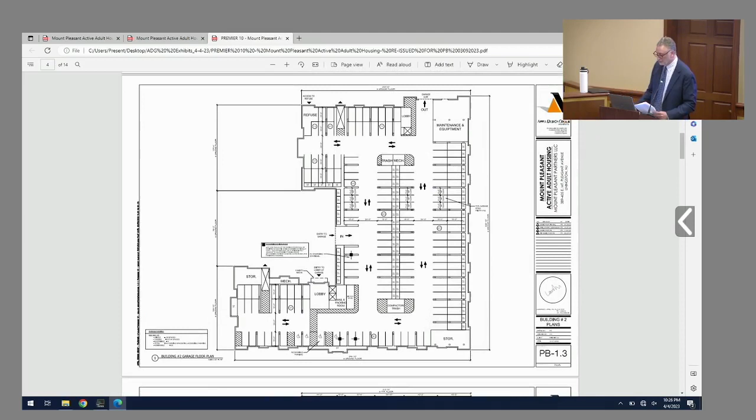Okay, I'll give you a good example, I'll take this building so we can look at it a little closer. We try to get the compactors as close as possible to the elevators for convenience, so that the chute for the compactor is located as central as possible.

At the TRAC meeting, they were asking about possibly creating some trash storage closer to the skin of the building. So we repurposed some of these spots, and close to the entry point we would provide a place where those roll-off containers could potentially be stored, or some recycling as well. This was kind of responding to the comments at the TRAC.

So what you're saying is the trash chute will go down to the compactor, and then that container will get moved to the refuse area? When they're full, they can be staged in there. In my opinion, you probably don't need that extra storage. It was really an accommodation to the folks at the TRAC meeting.

TRAC, technical review and advisory committee. Will the compactor rooms have drains and water?

Correct, drains, water, it's all there - all the requirements that make them appropriate.

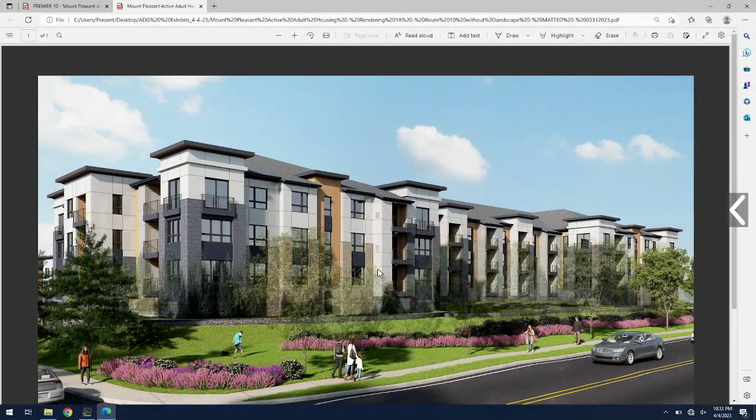Where are those, the mechanical packs? We've turned them, so on one side of the turn you can see the grille is tucked in, and it will be color matched. In other cases they're not facing you directly, but turned 90 degrees. We found that to be a good strategy - they just don't catch your eye.

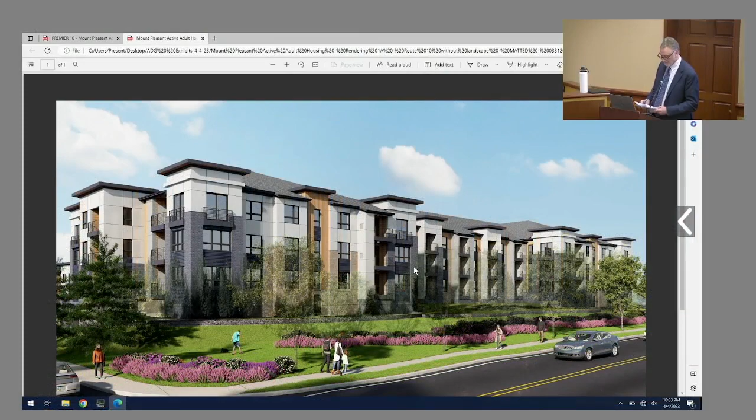I'm getting some pressure up here. We have the 18th. I'm probably about 70% through, so there's still questions and we have the holiday tomorrow. Can you come back if we interrupt here? We're not going to finish, obviously, I'm just worried about you. Well, I can be available at the next meeting. I was hoping to get through everything, but I'm at your discretion. This is a good place to break - we saw building one. Okay, we'll put a bookmark in it and come back.